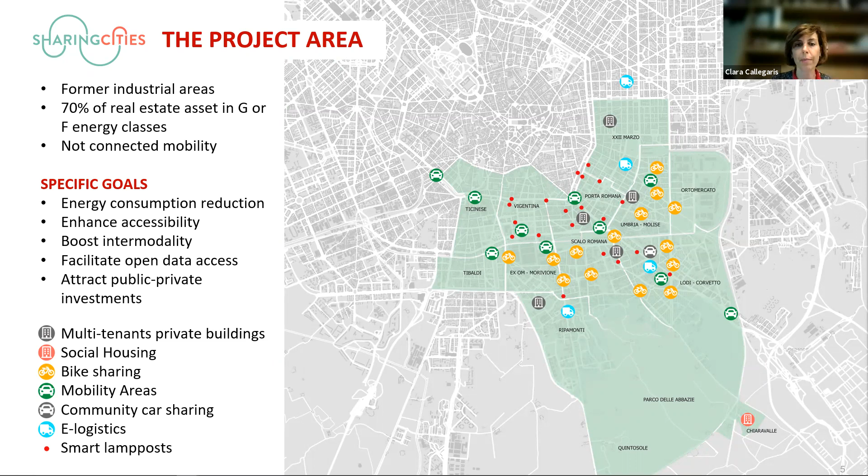So this is the list of all the activities and infrastructure that we have been implementing. If we go further with the next slide, this is a synthesis of what we have implemented throughout all these years. A big activity has been done on building refurbishment, in which we have to admit that at the beginning we were quite afraid that we would not have been able to reach the goal, because we had a very challenging goal in this segment.

We needed, in fact, to refurbish 21,000 square meters of private buildings, on top of 5,000 square meters of public residential buildings. And after all these years, we were very proud, because we not only reached the goal, but even went on top of it, renovating 5 private residential buildings on top of the public one, and reached almost 30,000 square meters retrofitted.

It was very challenging, because when we are talking of private residential buildings we had to convince the private owners, the majority of them, to invest and to have all the building undergo a little bit of uncomfortable workings, in order to have, after all, obviously a lot more comfortable apartments and less consumption of energy.

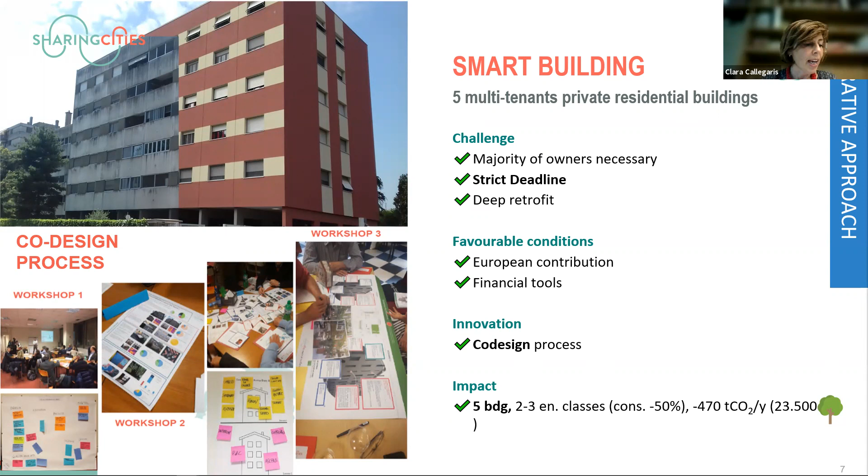This was very important for us, that we have been able to integrate the use of the bike system into this pilot area of Sharing Cities, which previously did not have a lot of stations compared to the Sharing Cities implementation. Now we have a lot of data collection on the tracks used and the number of travels used by people, starting from these stations, which gives important feedback on the success of the measure.

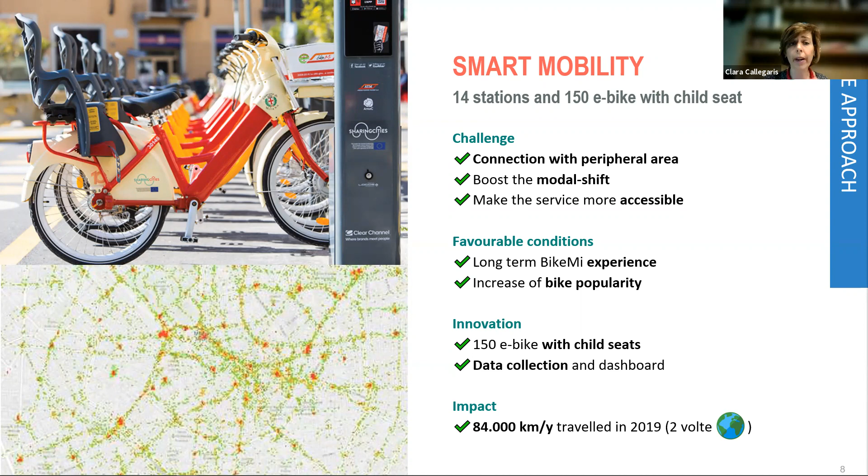Next, just a quick image of the fact that all these implementations in this Sharing Cities area have been done with an additive approach, because if you go around, you will see that we already had in this area, for example, undergrounds, ongoing public transport buses, and bike tracks since different years. But thanks to Sharing Cities, we have been able to implement these mobility measures with others, for example the car sharing system thanks to the charging points added in all these areas, and the scooters.

In any case, there has been a very enriched modal transition thanks to this mobility offer. And just to close the overview, on the next slide you will see how we managed here in Milan.

You will see how we managed here in Milano to increase the investment brought by the Sharing Cities project with other investments, thanks also to internal replication in the city of all measures with other strategic activities done by the municipality. The smart buildings have been a very effective and important action, and now we are replicating it thanks to another procurement called the BE2 call, which gives a lot of money for both public and private buildings for strong building retrofit, continuing the positive effect of the Sharing Cities project.

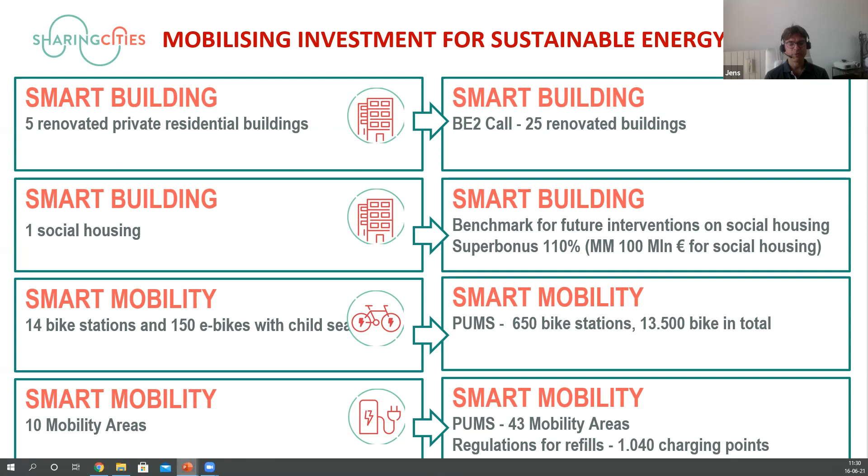So I would directly hand over to Martin. He actually has a business consulting background and is responsible for oversight and implementation of projects in Warsaw that have to do with climate change and emission reduction commitments. He also implements activities related to climate diplomacy and partnerships, and he will now give you some insight into Warsaw's experience with the Sharing Cities project from a fellow cities perspective. The floor is yours, Martin.

Thank you so much, Jens, and thanks for having Warsaw here. It's a challenge to impress people after such a presentation from Milan with many cases of innovative ways to enhance mobility and so on, but I will try to do my best.

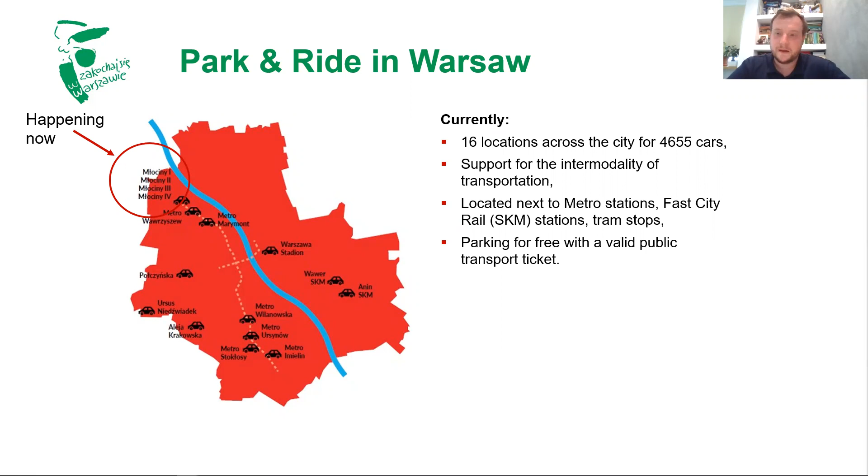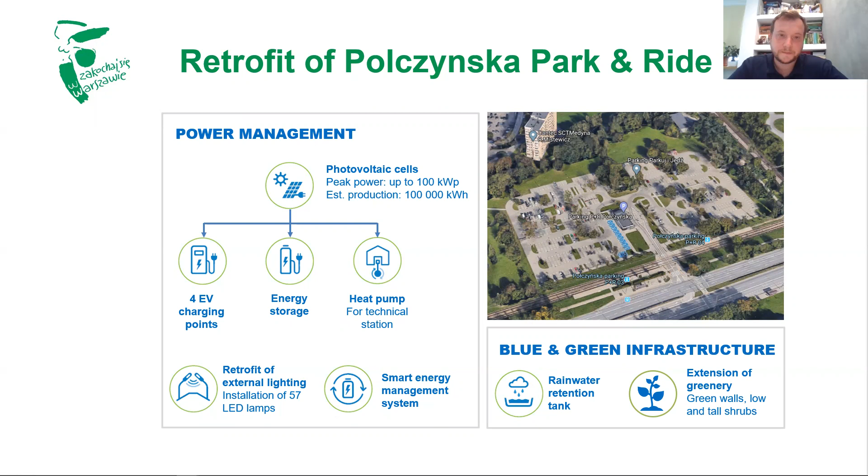These calculations are rough, so I won't be so positive. I would say we can reach half of this. We conducted a greenhouse gas inventory this year, and it turned out that the whole emissions from Warsaw are around 12 million tons.

It's almost 10% reduction potential here when the solutions are implemented. The scalability of the projects was one of the main points to be taken into consideration. We have 16 more or less similar facilities, but the outcomes and experiments can be easily leveraged in different cities, neighbor communities, and also across Europe.

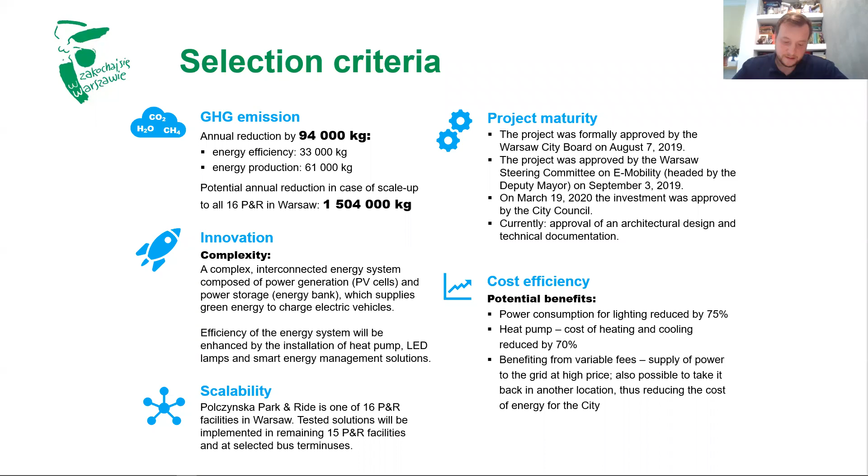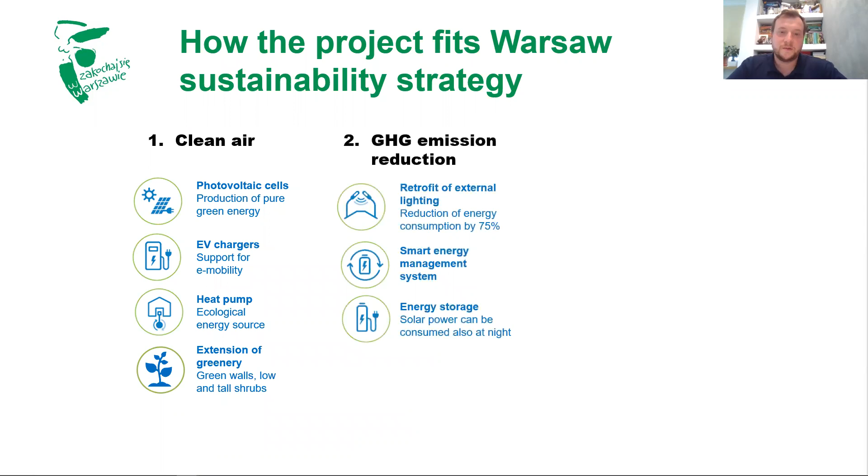This links pretty well with our department priorities. One is clean air. The second one is mitigation and adaptation to climate change. Our goal is not only to create a facility to be used as a park and ride, but also to provide a field for further activities and projects in the area of education, to ensure a place where people can go and enjoy their time.

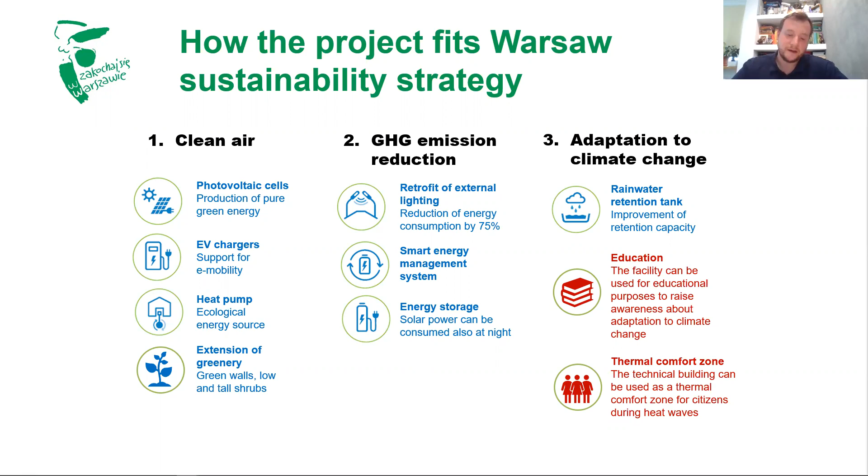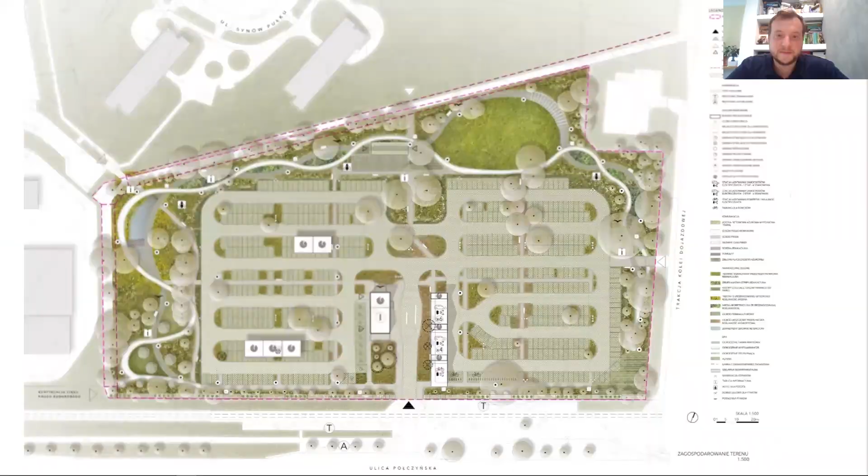That's how it will look, hopefully in the coming years. As you can see, a lot of greenery, photovoltaics are also an important element, and the energy management systems here.

During the weekends, or after the cars are out, this will be a place that people from the neighborhood can go, enjoy their time, spend some time, and learn a bit more about the projects implemented here. So basically, one more green space or park in such neighborhood, which is very important from the adaptation, mitigation, and clean air perspective.

I do have some photographs of projects. That's hopefully how it will look like. Now we are at the procurement phase. So not only park and ride, but also a place where people can spend some time and enjoy their weekends, for example, once the car facilities are closed.

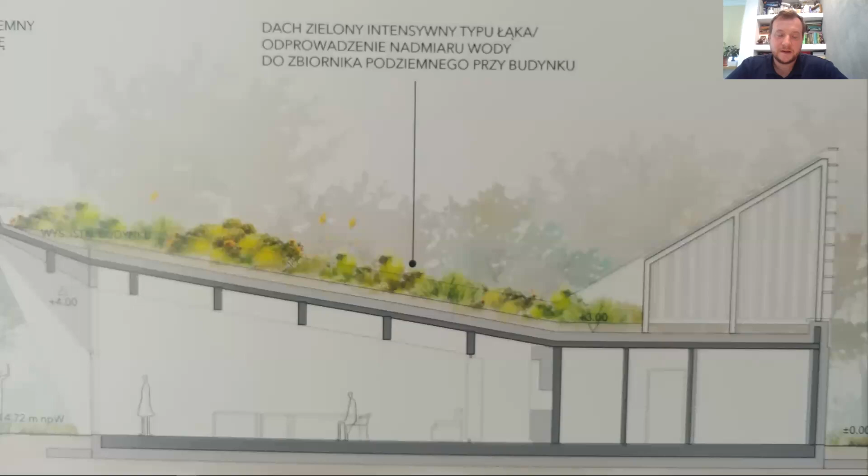On the last photograph, on the next slide, we have the replicable modular photovoltaic structures that are an object of one of our feasibility studies, which we will conduct in the coming months, and similar equipment will hopefully be installed at other park and rides as well.

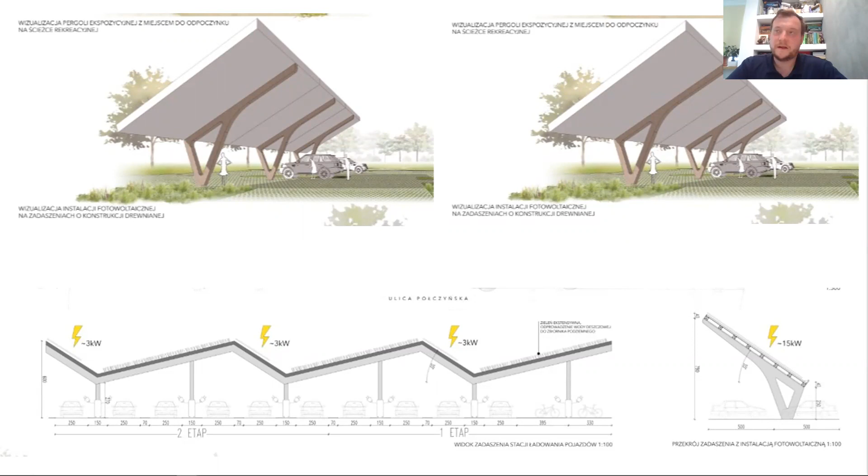This is our main input, insight, or project for Sharing Cities. The benefit of being here is the leveraging options. On the next slides, you can see the three options we were thinking of for how to leverage the outcomes of this project, and two of these, on the left-hand side and the right-hand side, will be funded from Sharing Cities funds.

First of all, the concept of these repeatable modular photovoltaic structures in outdoor park and rides, and the vertical gardens and green roofs that can be scaled up at different facilities that we have.

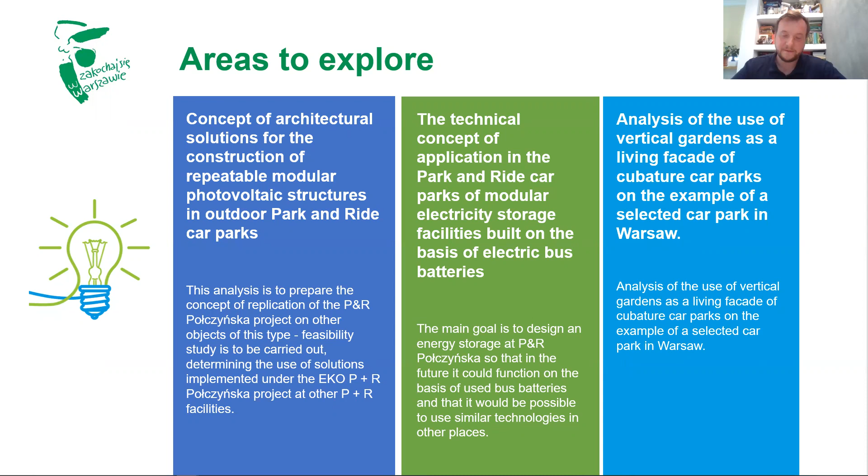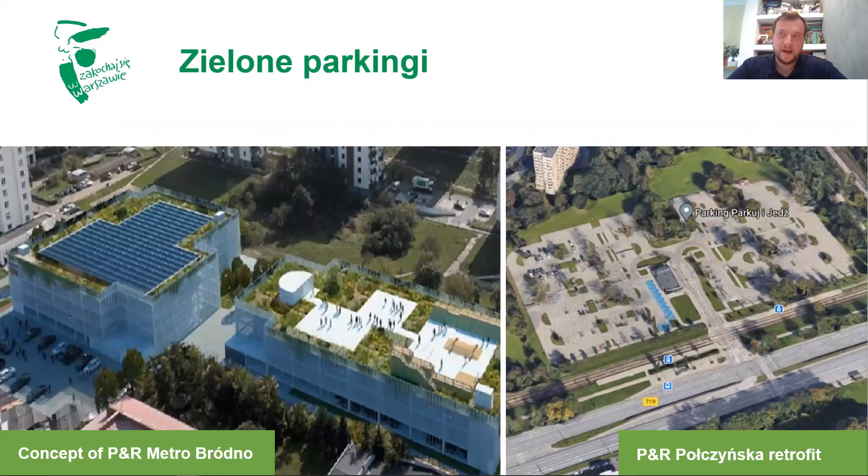Apart from the park and rides, we do a lot. I prepared a selection of projects for you to see what we do in the field of energy efficiency and smart cities, but also those were in many cases somehow inspired by other cities from the Sharing Cities project, especially the smart infrastructure that I will talk about in a second.

There is information about the development plan for the charging infrastructure. It's difficult to think about being climate neutral without mobility in the city. Electric car is still a car, so the mean of transport switch is the ultimate goal.

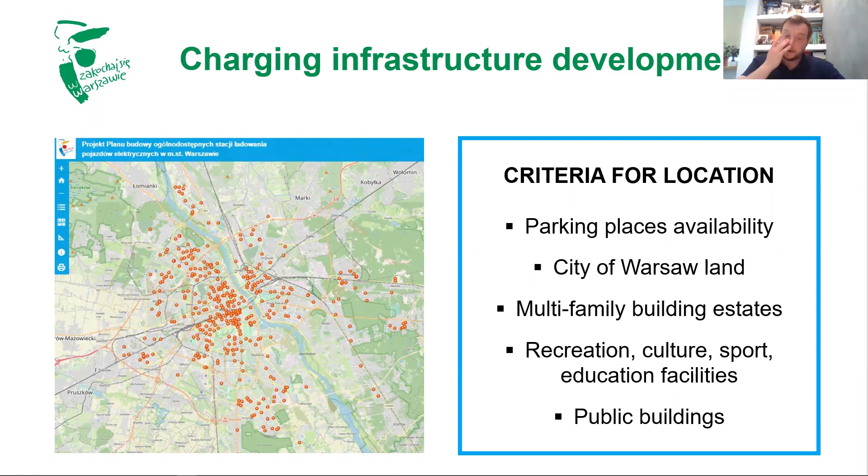But for the short or mid-term, we have to ensure our inhabitants that they will be on a safe side when it comes to mobility infrastructure and charging stations. On the next slide, you can see that a lot of those points were planned at our park and ride infrastructure and points, not only within Warsaw, but also with our neighbor communities.

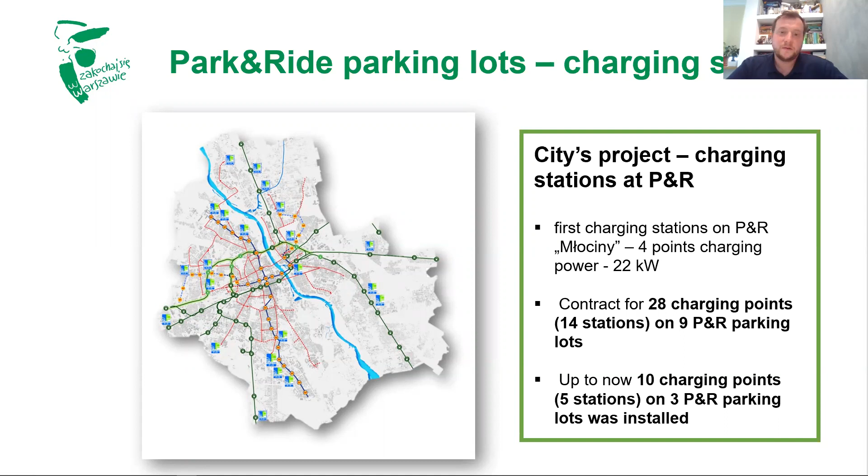So this will enhance the mobility concept here. On the next slide, you can see other projects that we are currently procuring. It's the Warsaw Air Quality Index and a set of reference stations, but also air quality sensors.

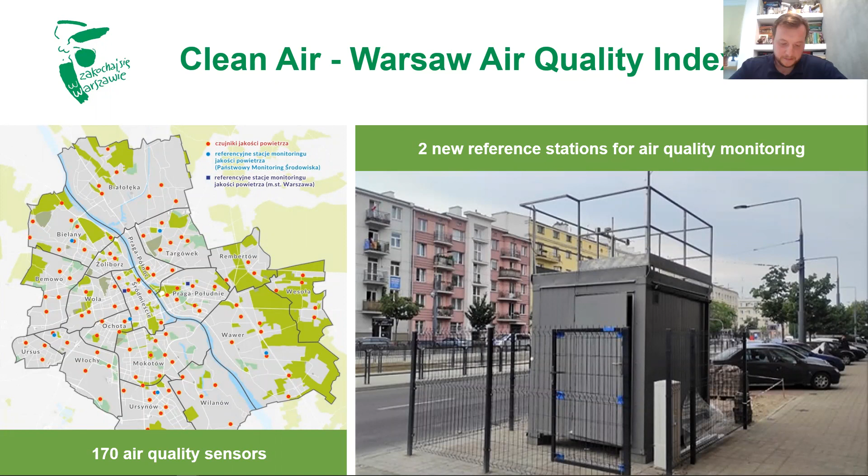Some smart person said that if you can't measure it, you cannot manage it. The sensors are not a solution for air quality, which is pretty low in Warsaw, but if we are able to map a hotspot, for example, we will be able to implement solutions where required or prioritize actions. On the next slide, you can see a project that is linked with the previous one.

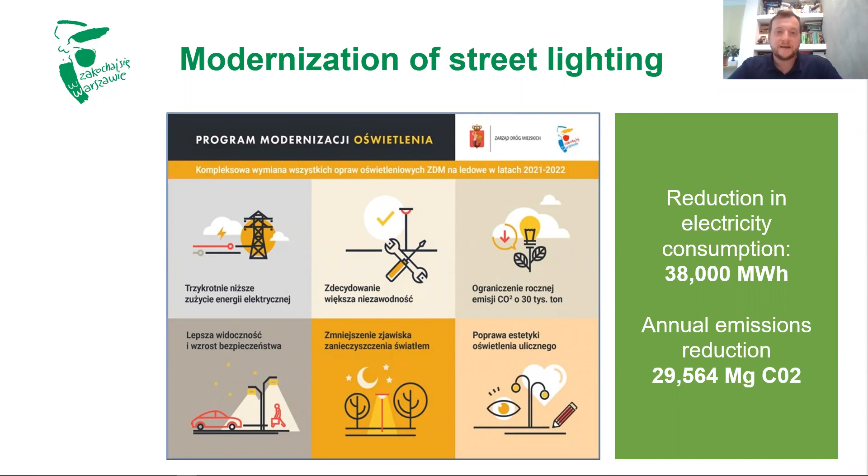And last but not least, it's about the inclusive climate policy that we are making in Warsaw. So the Warsaw Climate Panel happened last year. We invited 90 random people representing different ages, genders, and places across the city, so they could develop recommendations and vote at the end of the process on recommendations that are binding for the city.

One example of the recommendations that were voted on is the Green Building Standard of Warsaw — a set of guidelines on how to prepare city-owned buildings in Warsaw to be energy efficient or energy independent currently, or how to design them so they can be equipped in coming years when funding is available. So how to be prepared for coming funding, and what are the benefits in terms of OPEX, even if the CAPEX rises a bit at the investment phase.

Yeah, so it was one of the greatest, I think, and bravest decisions that the city board made — inviting inhabitants and giving the steering wheel to them. The mayor, Rafał Trzaskowski, committed Warsaw to doing these projects without knowing them yet. So it was a huge commitment from his side, and I believe this sends a clear message to the inhabitants that we trust you, that we want to know what you think is best for the city.